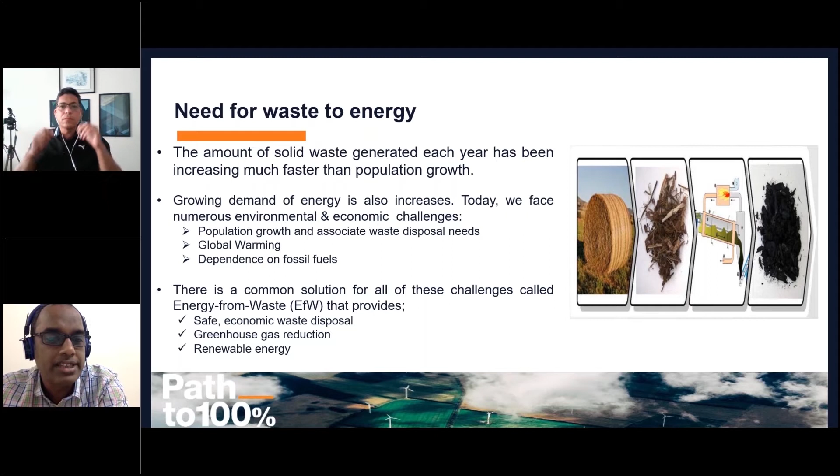As you know, biomass is considered to be one of the best potential sources available across the world. India produces about 450 to 500 million tons of biomass per year, waste biomass coming out from different agricultural residues and forestry. Biomass provides 32% of all primary energy usage in the country at present. The Ministry of New and Renewable Energy, MNRE India, estimates that the potential for power from biomass in India is about 18,000 megawatt as per the reference cited.

The current share of biofuels in total fuel consumption is extremely low and is confined mainly to 5% ethanol blending in gasoline. Now we all know that Brazil is a top manufacturer of ethanol from bagasse, sweet potatoes and other related sources. Brazil is using gasoline engines with the maximum blending with petrol. So Brazil is leading the usage of biofuel in internal combustion engines.

The Ministry of Renewable Energy has been implementing biomass power and co-generation for both power as well as heat generation. A total of 288 biomass power and co-generation projects with a capacity of 2,665 megawatt is installed in India, combined with 158 bagasse co-generation projects in sugar mills with surplus capacity aggregating 1,666 megawatts.

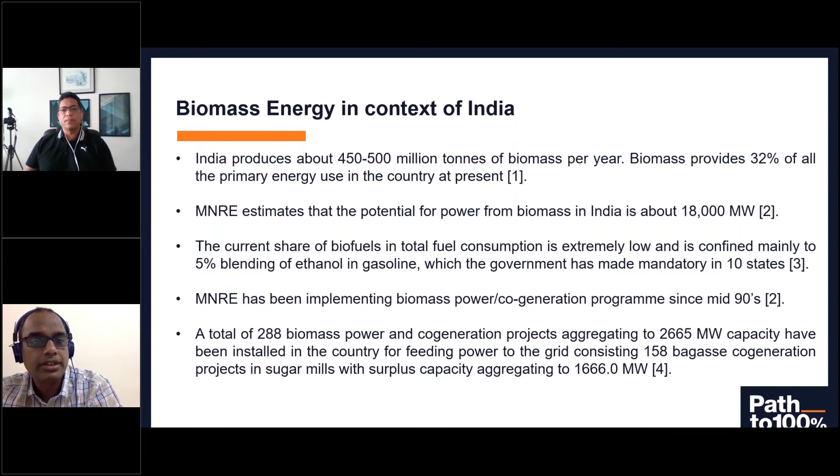So, well, you're supposed to know what is biomass. Biomass is considered to be one of the potential sources: all organic matter generated through photosynthesis and other biological processes. It consists of bio plus mass. Bio means a biologically derived substance which has some kind of mass. That is why it's called biomass.

Different biomass you come across in daily experience. You may come across wood and forest residues, waste from food crops. Then different waste comes out from the kitchen, then from the food processing industries, animal waste, manure, which is rich in phosphorus. Then human waste, which has the potential of energy, which can be converted into either a fertilizer or in the form of liquid or gaseous fuels, which can be fed into the different applications.

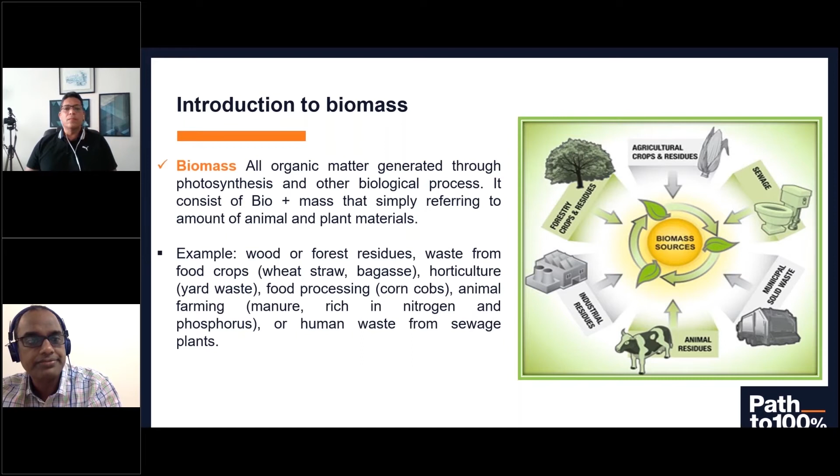So we know that there are different compositions which are available in the biomass. Lignocellulose biomass utilization has gained worldwide attention due to the property of green, copious distribution, and renewable source. The residues from agricultural activities and forest environments are the important source of lignocellulosic biomass. Major chemical constituents of the biomass are cellulose, hemicellulose, and lignin in terms of 39%, 31%, 18% by weight respectively.

Okay, this photograph talks about the different biomass sources available. You can see here in the rightmost one, the cellulose content is major in terms of biomass, 39%. Hemicellulose will be available. If you take any biomass, either forestry waste or agricultural residues, you can find out the chemical composition of different biomass. Cellulose, hemicellulose, and lignin are the major constituents present in the biomass. And then you can find out the application. You want to convert the biomass into a liquid fuel or gaseous fuel or solid fuel. So, accordingly, it's going to differ.

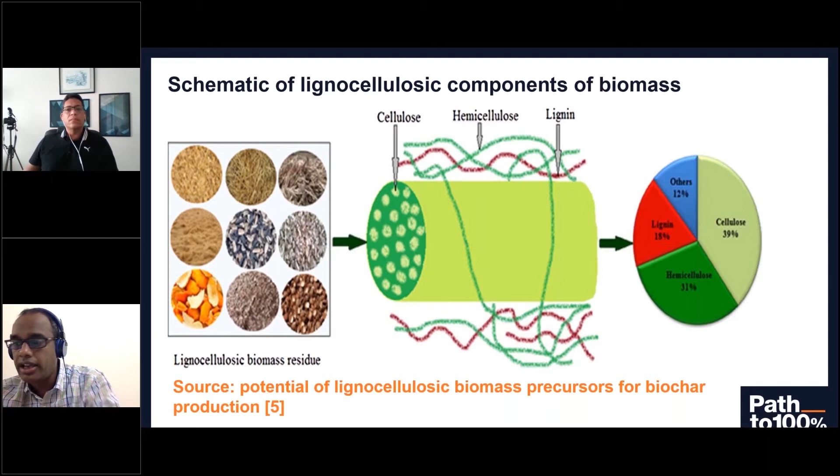So, what is the significance of the biomass? What is the significance of energy which is going to get derived from the biomass? It is a renewable source of energy. It's not going to be exhaustible. You can get it at any point of time. And also the cost of feed material you are going to use for biofuel production or bioenergy generation will be very low when compared to fossil fuels of coal and oil as well as gaseous fuels.

Biomass consumes more CO2. That is very much advantageous. Whereas by consuming the fossil fuels, it liberates a lot of CO2, which is increasing global warming. Global temperature increases because of the increase in the CO2 level. Whereas if you make biomass a source, and if you cultivate it in very far lands or dry lands, you can grow the trees or other kinds of agricultural products. It is going to consume whatever CO2 is available in nature. So the CO2 balance is going to happen by using the biomass.

And also you can see here there is a lot of biomass still not utilized from an application point of view. We are not going to use the biomass from the edible source. Still a few millions of species are available, not traced out so far for utilization in converting into energy. And also by increasing the biomass utilization or growing biomass resources, it can stabilize the soils. That is very much important, and improve the soil fertility and reduce the erosion.

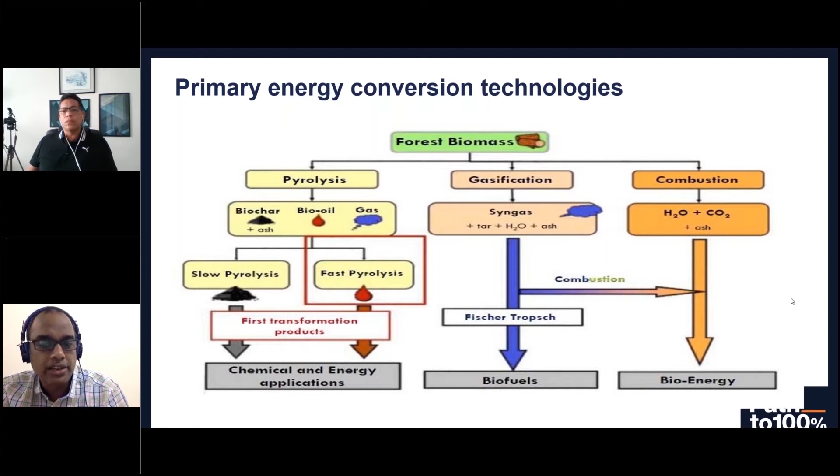Depending upon the operating temperature and residence time of the pyrolysis process, you are going to get three products: biochar, bio oil, and gas. If you want more liquid, you can increase the temperature of the reaction. There are three methods we generally utilize for converting solid biomass, whether you want a liquid or a gas, or to burn the fuel using the combustion method.

Pyrolysis is the method we are currently working on in NIT Tiruchi, together with Tomsk Polytechnic University and COPPE, Brazil. Professor Amro is also contributing to the two projects, one from SPARC and another from the BRICS project. So we are likely to work on pyrolysis.

Pyrolysis is the thermal decomposition of the material you feed into the pyrolyzer at elevated temperature. But you are not adding any kind of oxygen or air into the system. The process is done in the absence of air. Ultimately, you are going to get three products: solid, liquid, and gaseous products.

This liquid can be used in an internal combustion engine, thermal power plants, or a gas turbine power plant. The char can be converted into a catalyst, or used as a fertilizer. The gaseous fuel can be used in an internal combustion engine or a gas turbine, or in a steam power plant or gas turbine power plant.

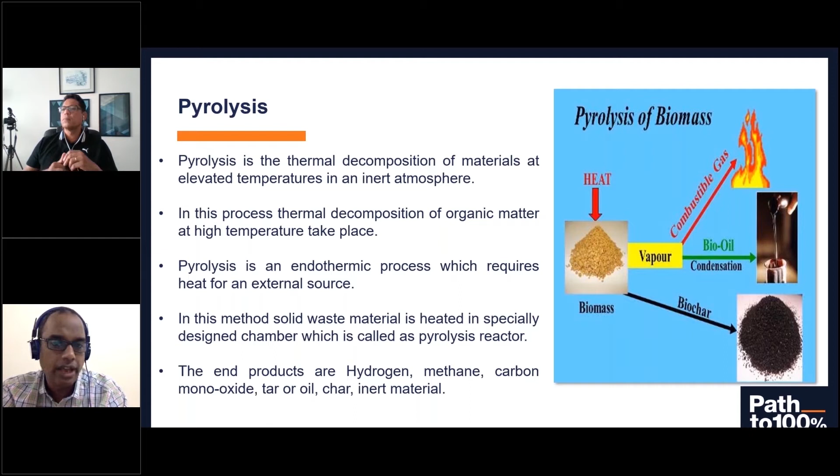The products that come out from pyrolysis are in the form of hydrogen, methane, carbon monoxide, and the oil. You want to operate the system in the absence of air, that is, inert in nature. As for the mechanism of pyrolysis, the word is pyro and lysis. Pyro means heat, lysis means breaking down the heavier molecules into small molecules.

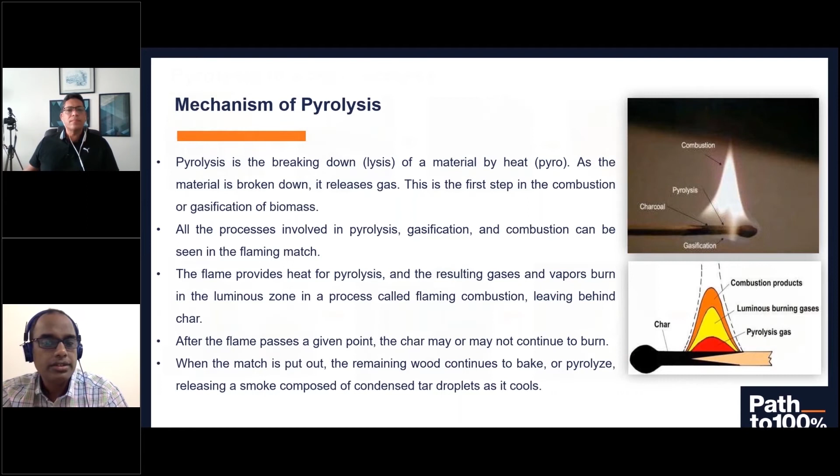The products you get from pyrolysis are in the form of liquid, gas, and solid. But in pyrolysis, you get the maximum amount of liquid apart from the solid and gaseous products. There are many biomass sources available, and in our campus we have used Cassia fistula, the golden shower tree. You may have come across it.

That waste material is polluting the environment, and the waste is generated in a huge amount. So we take out the seed and the shell and convert it into a solid product which can be ground into a fine size. Then we take it to the pyrolyzer. We can use either a thermal pyrolyzer or electrical pyrolyzer, or recently we are using microwave pyrolysis.

As you know, microwave is also an energy intensive process, but the amount of energy consumed for melting the solid biomass is comparatively lower than electrical and thermal pyrolysis. Also, the heat comes from inside to out, which means the energy losses to the surroundings are minimized. So we go for a microwave pyrolysis system.

The products you get are condensable and non-condensable gases. The condensable gases are connected to a condenser and converted into liquid, which we call bio oil. The non-condensable gases can be taken for some kind of thermal application, flared, or burned in an engine to convert into power. The solid residue generated in the pyrolyzer, whether microwave, thermal, or electrical, can be converted into a fertilizer or into a catalyst by converting it to activated carbon.

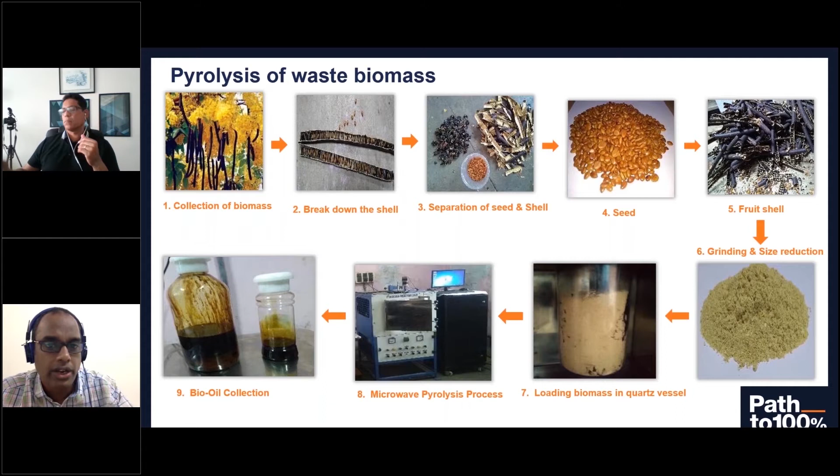Seed you can directly convert it into liquid. Okay, so this is the photographic view of oil extracted from the pyrolysis process, particularly microwave pyrolysis. Then the non-condensable gases are not going to be condensed. Then you can burn it. We can use it for any kind of heating application, or burn it in the internal combustion engine. You can use it in a diesel engine. You can burn it and produce power, or you can have a standby diesel generator. You can use it for producing power.

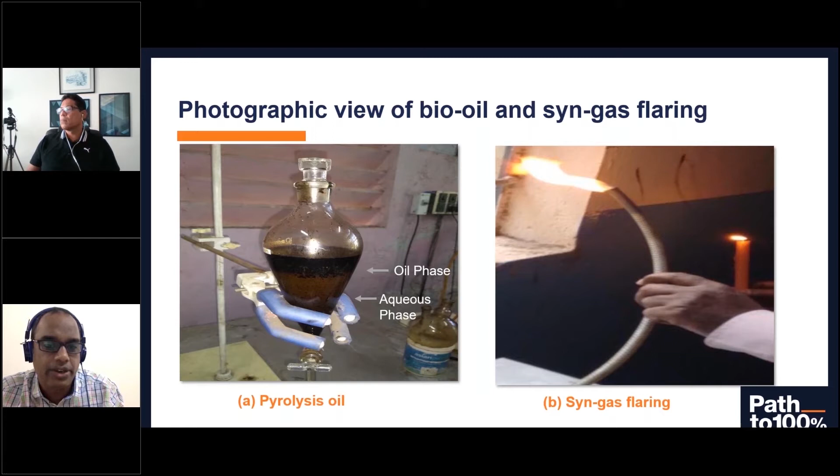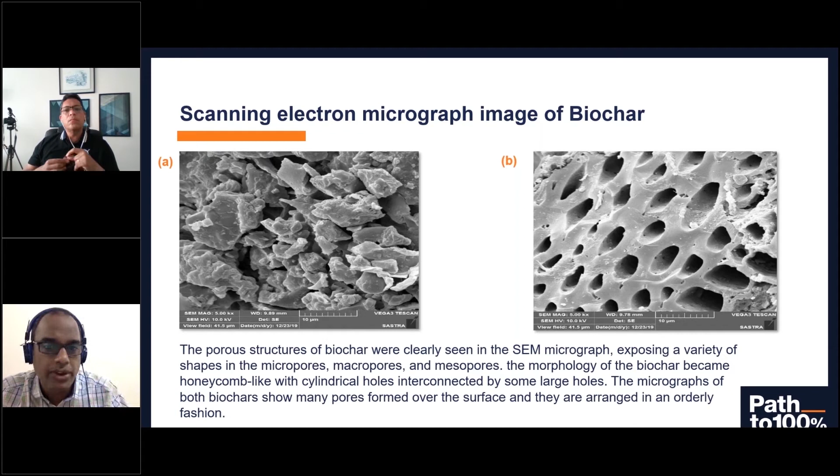So we are going to get three products. Solid, you can use it for many applications, wastewater treatment as well as converting into catalyst. Then we can use it for fertilizer. Liquid, we can use it for internal combustion engine and gas turbine application. Gaseous one, you can use it for internal combustion engine, or take it for gas turbine as well as thermal power plant. So nothing is going to be wasted. And whatever gas comes out, you can burn it efficiently without polluting the environment.

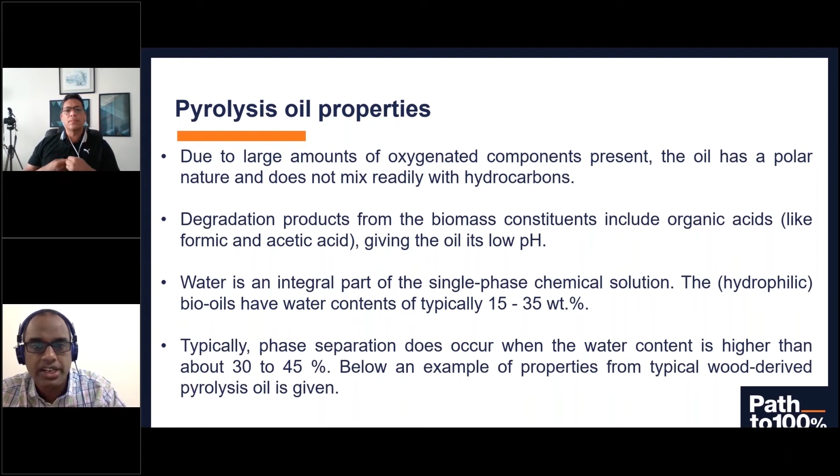So for pyrolysis oil properties, you can take it for gas chromatography spectroscopic analysis. You can find out what different species of hydrocarbon are present. Then you can find out what the energy content may be. You can compare with petrol and diesel. As you know, petroleum products come around 48,000 kilojoules per kg. Diesel comes around 45,000 kilojoules per kg. The bio oil is not at all going to be inferior to gasoline and diesel. It is comparatively equivalent to diesel because bio oil is a non-volatile fuel, so we can directly use it as a complete replacement of the diesel fuel. It has a good property.

So if you take out the properties for bio oil, gasoline, diesel, biodiesel and vegetable oil, you can see here the density of the bio oil is slightly higher, and viscosity is slightly higher. Flash and fire point is much higher than diesel and petrol. That means there is no problem transporting this fuel. And you can operate at places where the liquid is likely to be frozen. We can go up to minus 20 degrees centigrade. Where the temperature does not fall below minus 10 degrees, you can use it conveniently. Otherwise, you can use some kind of additives in this pyrolysis oil. Then you can use it efficiently.

Okay, so you can see here it is approximately 60% of the calorific value of the diesel. That means the only thing is you're going to increase the volume of the diesel tank by twice. And the density is comparatively higher. So to reduce the viscosity as well as the density, you can blend it with diesel or other liquid fuel which has lower viscosity as well as lower density.

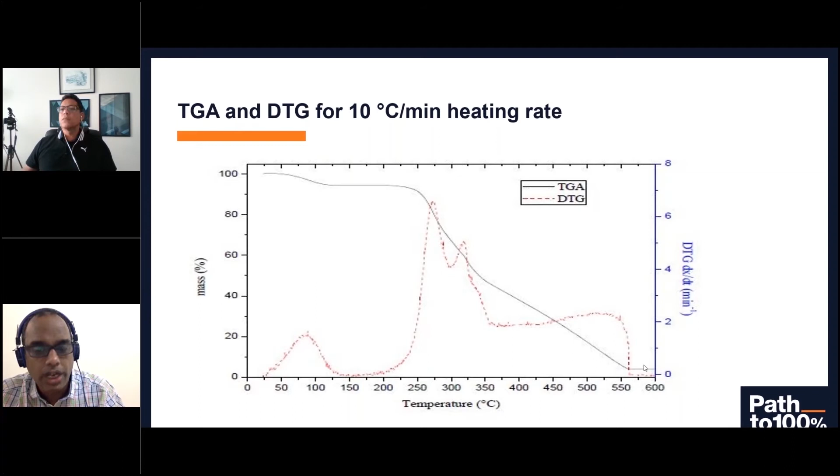Whether you go for slow pyrolysis, medium pyrolysis or fast pyrolysis, and the residence time in which you are going to operate it, that decides the product yield, whether you want more liquid, more solid or more gaseous products. That depends upon the operating temperature.

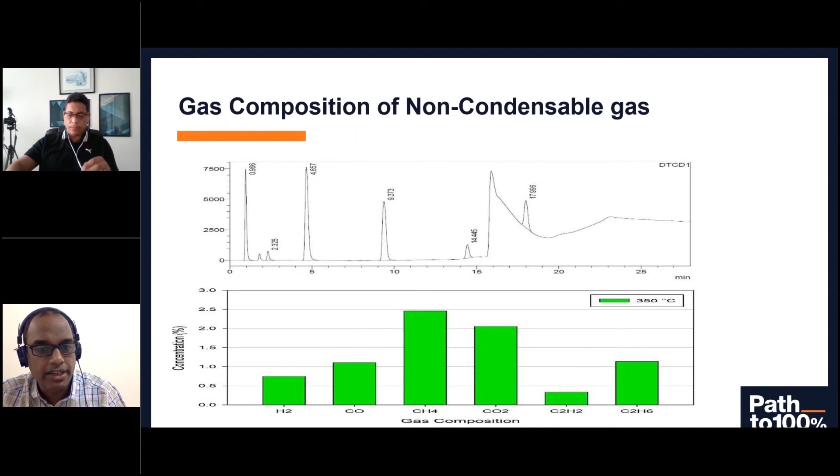Yeah. So, various processes. I think I'm going to take maximum 5 minutes.

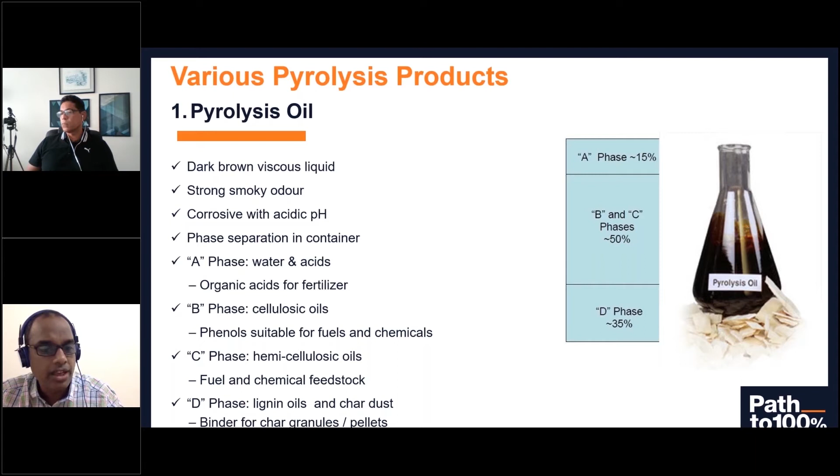B phase is cellulosic oils. Normally the phenols are suitable for fuels and chemicals. So there are different layers you are getting, and you can separate them out according to their different densities. Then it has several applications. A you can use for fertilizer, B phase for chemicals and fuels, C phase for fuel and chemical feedstock preparation, and D phase for binder for char granules for pellets.

So in non-condensable gas there are several products: hydrogen, CO2, CO, and other things. It also has potential applications. You can use it for a gas turbine, internal combustion engine or thermal power plant. Otherwise you have to flare it up. It also has energy content, so you should not leave it to the surroundings. It has some hazardous constituents.

Biochar: after converting the biomass into bio oil or non-condensable gases, whatever residue is left over in the pyrolysis is called biochar. We call it charcoal. It is carbon rich in nature. It contains inorganic minerals from the biomass. You can use it as a fertilizer, or convert it into a catalyst for Fischer-Tropsch reaction or any other reaction, or convert it into activated carbon for wastewater treatment.

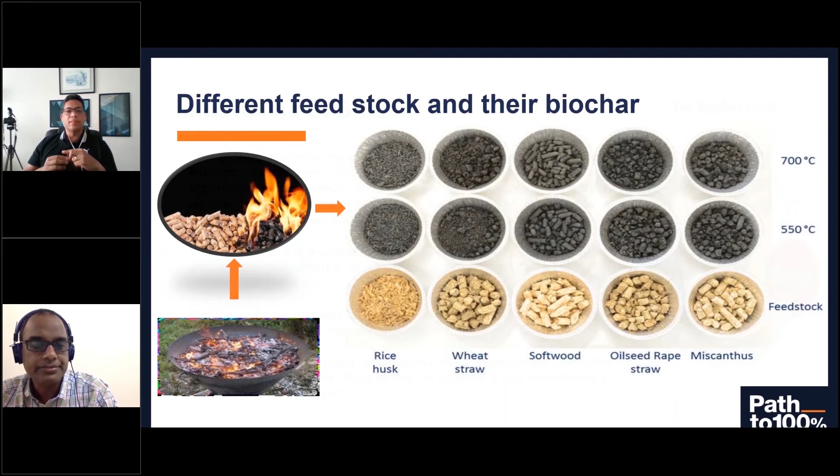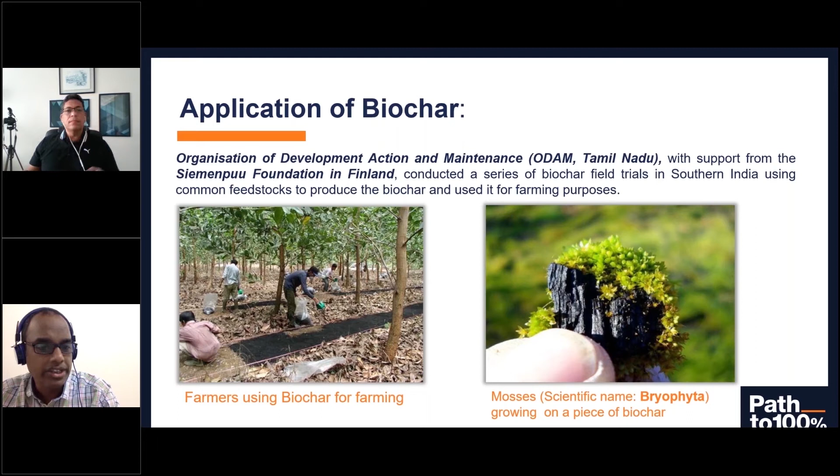So the importance of biochar I already explained. I don't want to repeat this one, but whatever biomass we are taking out has to go back to the earth as a fertilizer. It has a potential application as a fertilizer for growing trees and other agricultural crops.

So, different applications of bio oil. You can convert it into chemical products. You can use it for fermentation, convert it into ethanol, and use it in a petrol engine. You can use it as turbine or diesel engine fuel, and as fuel for thermal power plants, particularly steam turbine power plants. You can upgrade it through refinery methods. You can take out the hydrogen from the syngas generated from either the pyrolyzer or gasifier and use it for fuel cell applications.

And just to let you know, you have 2 more minutes. Yeah, I'll likely be there. Coming to the conclusion. Okay.

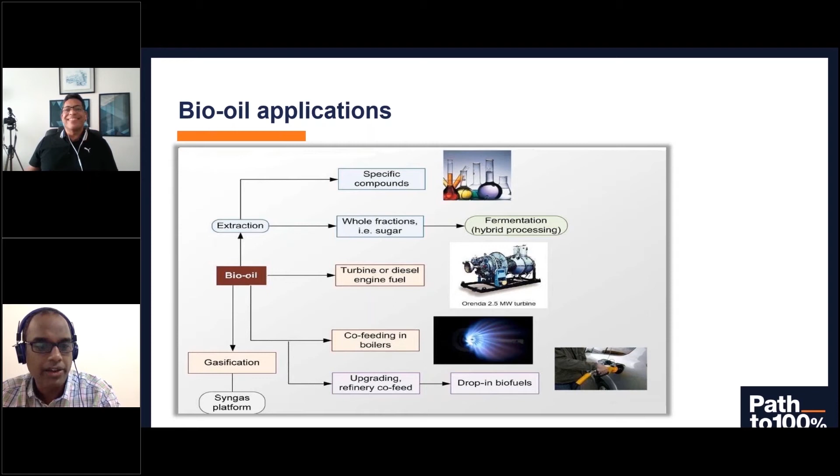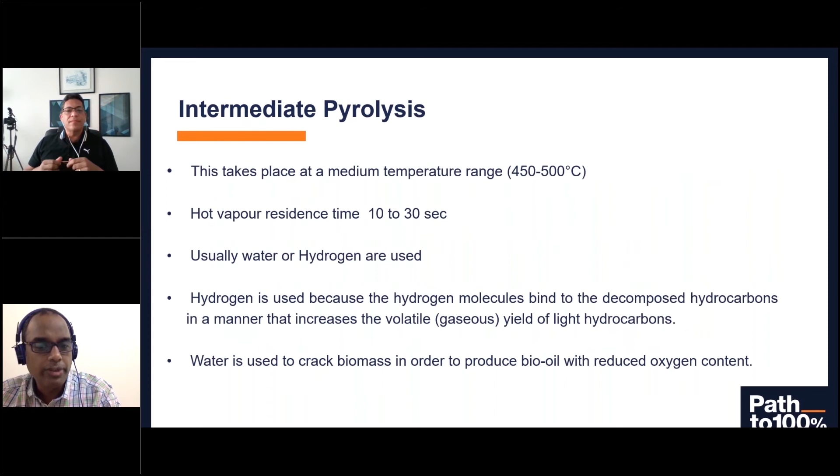Okay, so there are different pyrolysis processes. They vary based on the operating temperature, from slow to intermediate pyrolysis, and the residence time. So we are classifying the pyrolysis into 3 types. The most preferable one is flash pyrolysis, operating at a temperature of 450 to 900 degrees centigrade. The heating rate is 2 degrees per second.

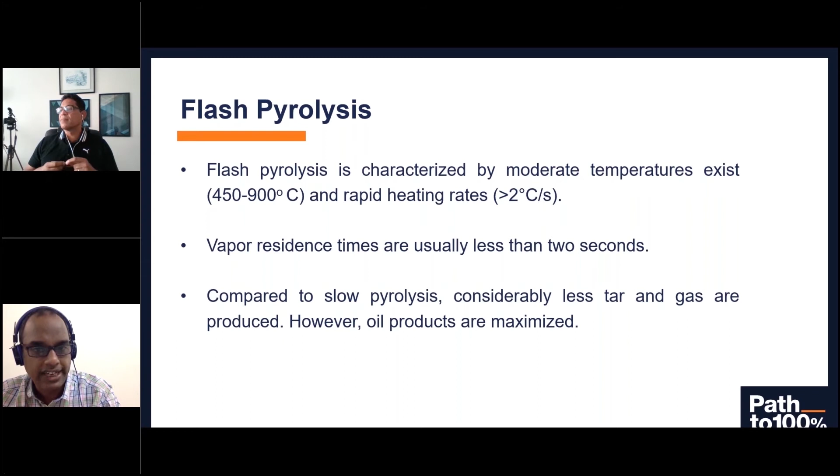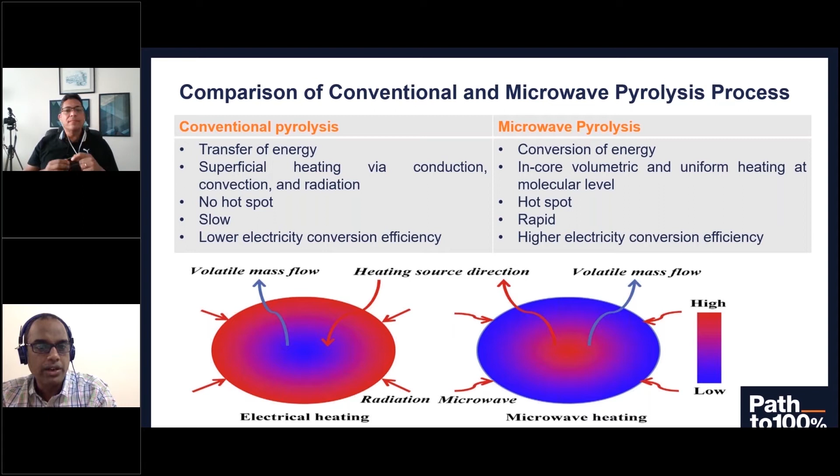Microwave pyrolysis is recent research they are doing, because it has a lot of potential. The energy needed for converting into liquid will be minimum while converting liquid to the maximum level, because the energy generated inside goes from the inside of the system to the surroundings, so the losses will be minimized.

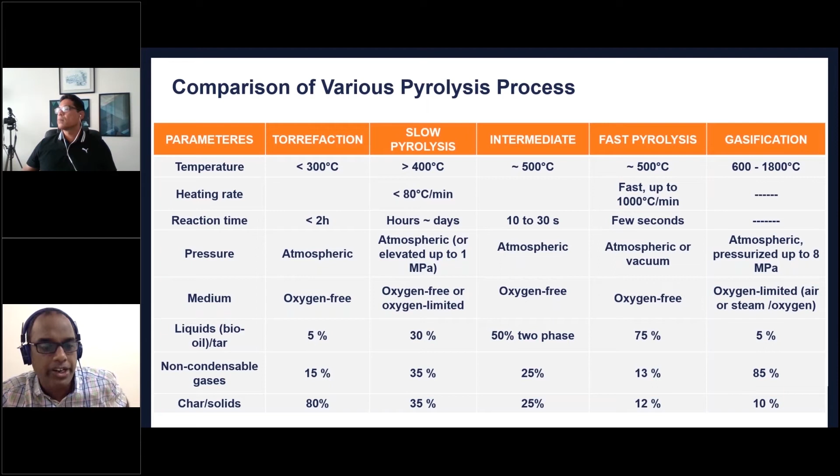Okay, so the table shows the different pyrolysis processes with respect to operating temperature. Depending upon the product you need, either solid, liquid, or gas, this is going to differ. The different properties I already discussed.

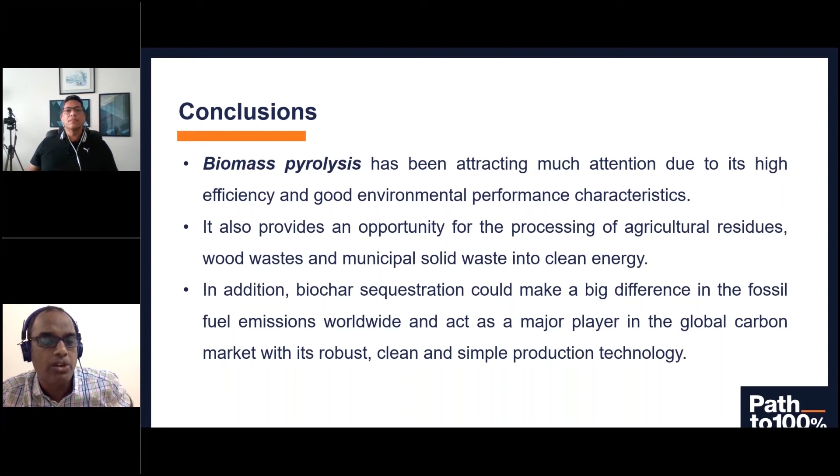So conclusions: biomass pyrolysis has been attracting much attention due to its high efficiency and good environmental performance characteristics. It also provides an opportunity for the processing of agricultural residues, wood waste, and municipal solid waste into clean energy production. In addition, biochar sequestration could make a big difference in fossil fuel emissions worldwide and act as a major player in the global carbon market with its robust, clean, and simple production technology.

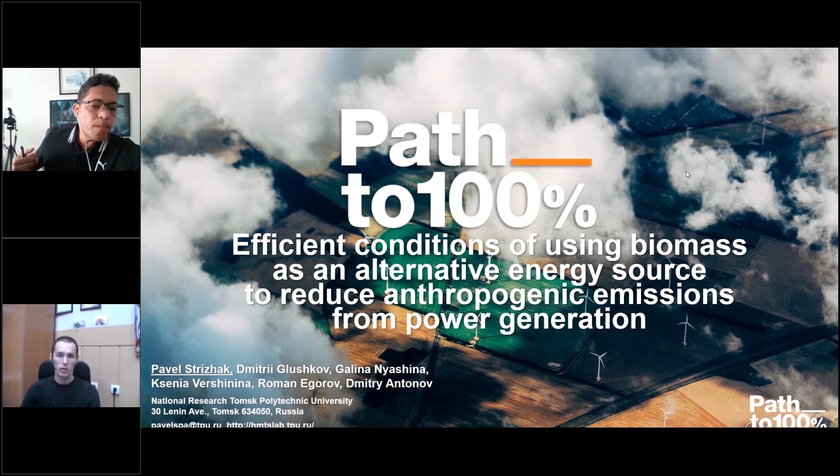At the beginning, I would like to say several words about the motivation of the present study. Biomass is the fourth largest energy source after coal, oil, and natural gas. It is a renewable source and a carbon-neutral fuel with the additional advantage of low nitrogen and sulfur content. Therefore, biomass is currently one of the most promising renewable energy sources. Using biomass in thermal power engineering can make a difference for economic development in rural regions and improve the internal energy security of a country due to the variety of available biomass resources and low level of greenhouse gases as opposed to fossil fuels.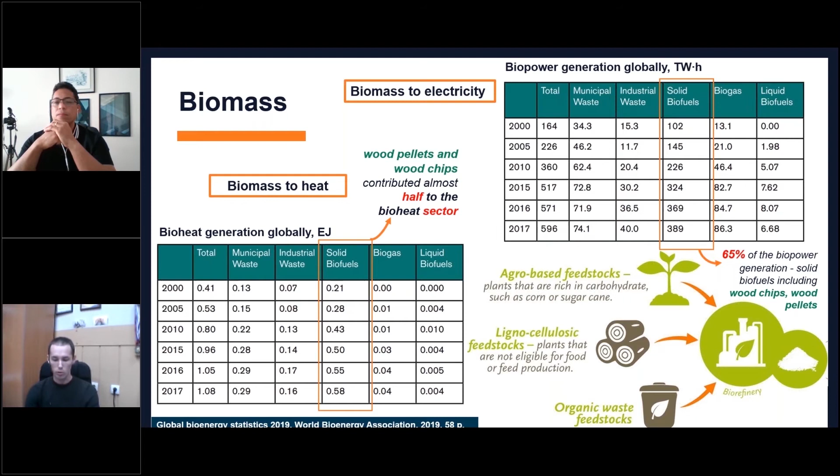The main methods used to process biomass for power generation are thermochemical and biochemical. The latter methods, such as extraction and hydrolysis, are more expensive and sophisticated in their practical implementation. Combustion, gasification, and pyrolysis are the most widely used thermochemical ways of biomass conversion. Each method has advantages and disadvantages. Gasification and pyrolysis are of interest in this study because new products can be produced during this process, such as liquid or solid fuels and a group of materials for chemistry.

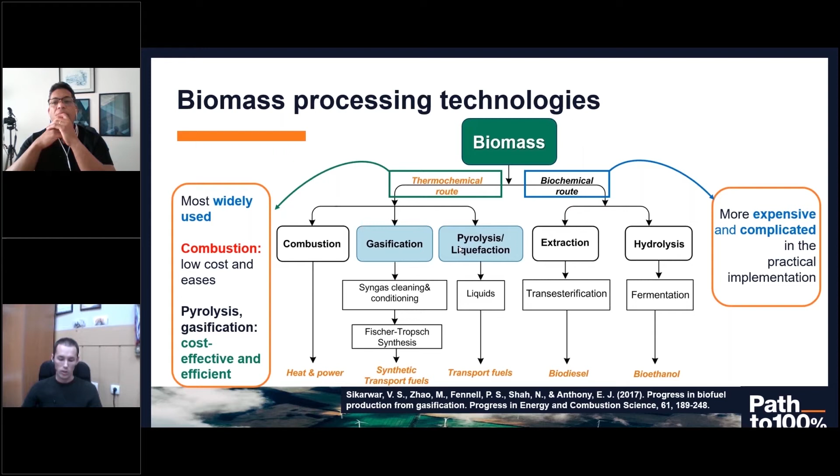As you can see on the scheme, biomass gasification is a multi-level physical and chemical process converting organic fuels into a gas at temperatures between 600 and 1500 degrees Celsius. A gasifying medium can be air, oxygen, water vapor, carbon dioxide, or a mixture of them. The generated syngas consists of methane, carbon dioxide, hydrogen, carbon monoxide, a small amount of light hydrocarbons, and other pollutants. The concentration of each component of the gas mixture mainly depends on the process conditions in a reactor, local conditions in the fuel sample, the chemical composition of biomass, and the structure of gasifiers.

Apart from syngas, the typical biomass gasification products are biochar, biofuel, and heat. The biggest challenge of gasification is the production of tar. It significantly reduces the quantity of syngas and interacts with the reactor walls. In contrast to gasification, pyrolysis proceeds at high temperatures in an inert gas atmosphere. Pyrolysis can be used on its own or can be the main stage of chemical reactions during gasification and combustion.

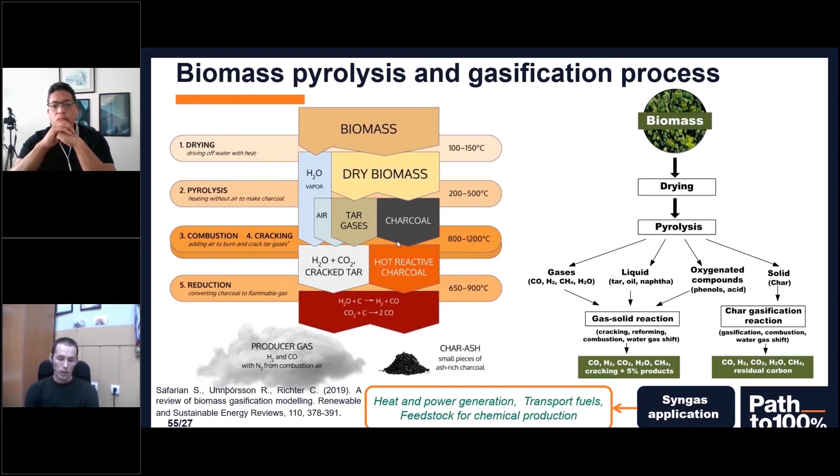In conclusion of the first part of our presentation, it should be mentioned that biomass is a high potential alternative energy source and feedstock to produce useful products for the chemical industry. The purpose of our study is experimental research of pyrolysis characteristics for a group of various biomass and their mixture with varying process parameters in a wide range. Experimental setup and procedures will be presented in the next part of the presentation.

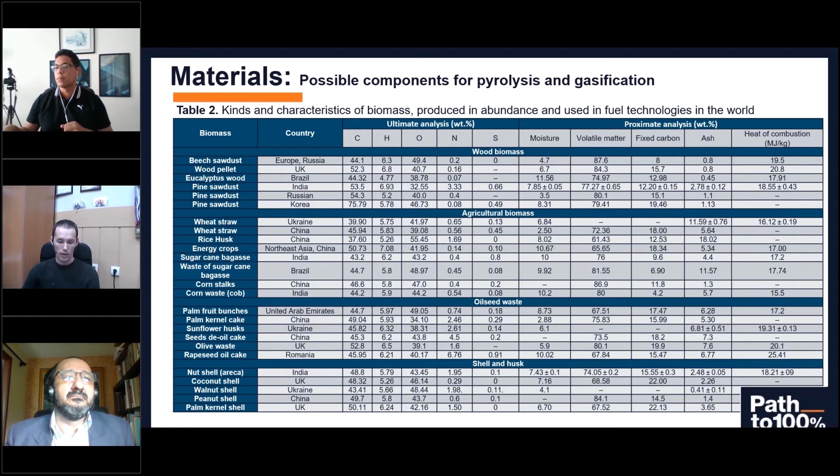There was no access of outside air to the furnace during the experiments. The duration of the experiments was about 30 minutes. The gases left after the experiments were removed from the chamber by blowing air through it. We conducted no less than 3 runs at identical initial conditions. The next table illustrates kinds and characteristics of biomass widely used in fuel technologies all over the world. Based on this data, we chose only 3 typical kinds of biomass for our experimental study. They are sawdust, straw, and leaves. We conducted experiments with those individual components and their blends.

The main obtained results will be presented in accordance with the investigated parameters and effects. They are component properties and concentration, biomass moisture, thermal conditions, ratio of pyrolysis products with CO2 and water vapors in the combustion chamber, mass, shape, and surface structure of samples, dispersion of components, and a mixture of biomass with other components. Experiments for leaf, straw, sawdust and the 3 blends were conducted at identical initial conditions. Compositions of blends you can see in the 3 right columns.

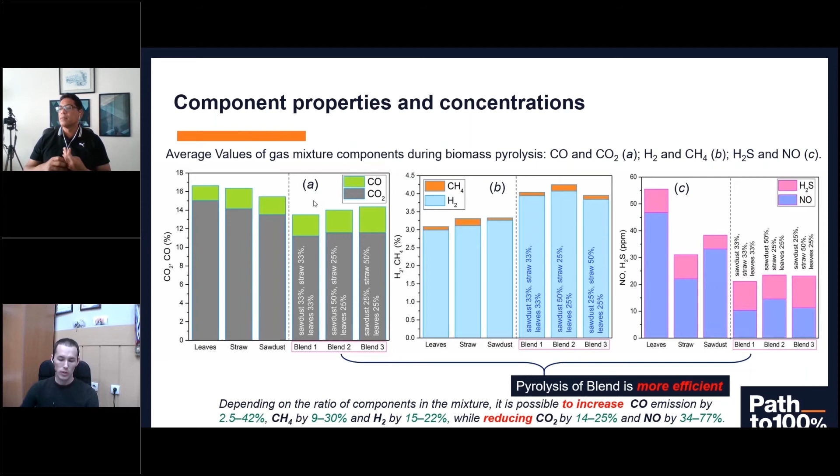It was obtained that the pyrolysis of blends is more efficient. Depending on the ratio of components in the biomass mixture, it is possible to increase the CO emissions by 2.5-42%, methane by 30%, and hydrogen by 22%, and to reduce the carbon dioxide concentration by 25% and nitrogen oxides by 77%. According to the obtained results, biomass blend number 3, sawdust 25%, straw 50%, and leaf 25%, is more promising for following investigations.

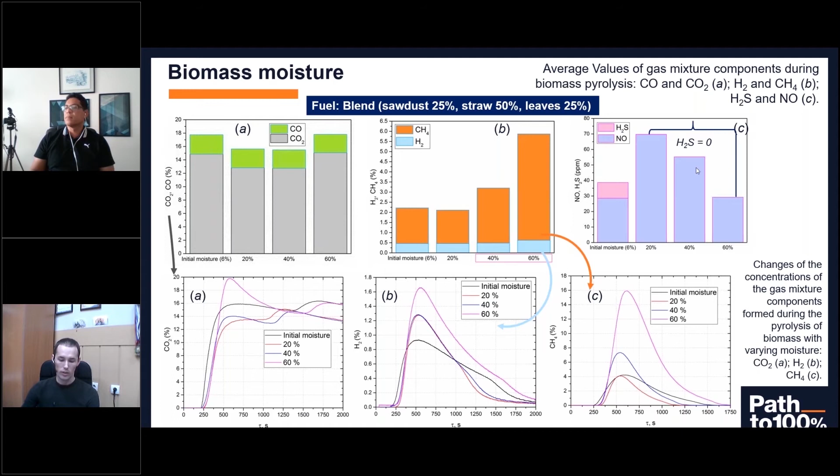The next investigated factor is the biomass moisture influence on the composition of the gas mixture. At the bottom of the slide, you can see typical trends of carbon dioxide, hydrogen, and methane concentration during pyrolysis. Average values of gas mixture components during this process are presented at the top of the slide. The higher the biomass blend moisture, the higher the concentration of useful gases.

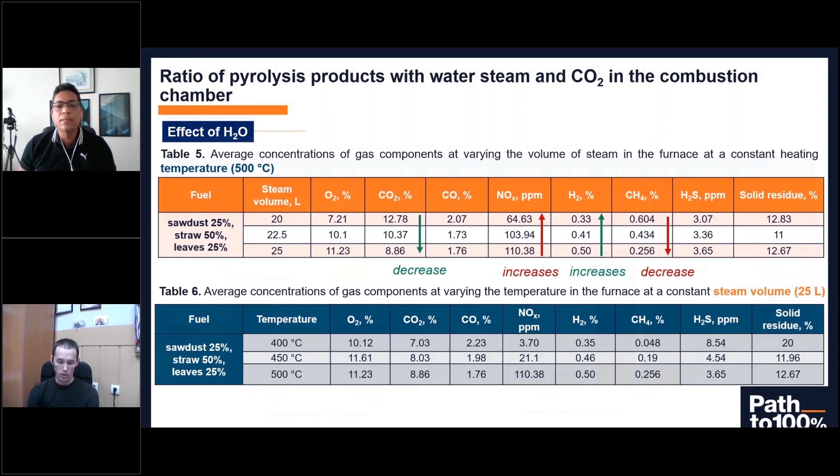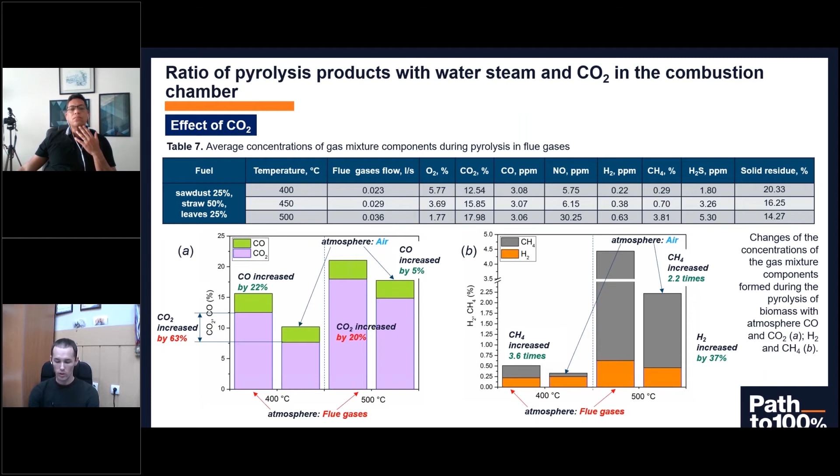The next two slides illustrate the influence of changing air in the combustion chamber to water steam and carbon dioxide on the pyrolysis characteristics. Table 5 illustrates the influence of water vapors on the gas concentrations. The higher the water steam concentration, the lower the concentration of carbon dioxide and methane, and the higher the concentration of nitrogen oxide and hydrogen. The next results illustrate that we obtain a significant increase in concentration of carbon monoxide and carbon dioxide, methane and hydrogen during pyrolysis when the oxidizing environment in the chamber was replaced with flue gases.

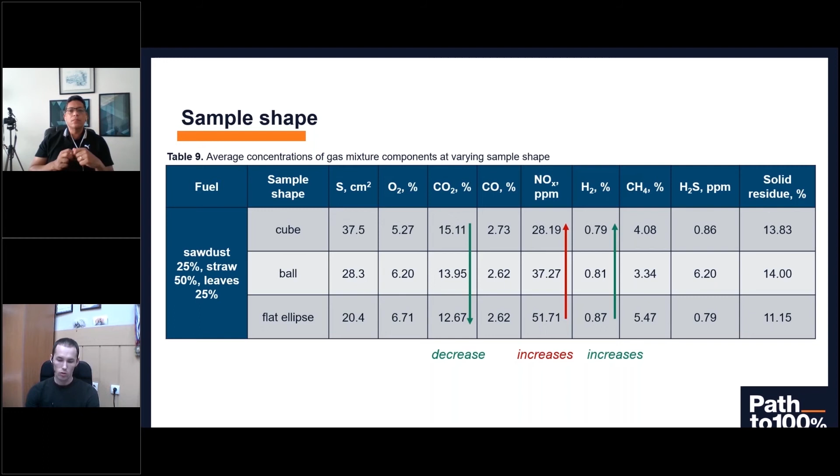Of course, experimental samples significantly influenced the integral characteristics of the process, such as the volume of produced gas mixture, but the concentration of its components did not vary significantly. In our experiments, we found that the shape of the experimental sample and the structure of the surface affect the characteristics of the process under conditions of equivalent initial weight of the biomass blend sample.

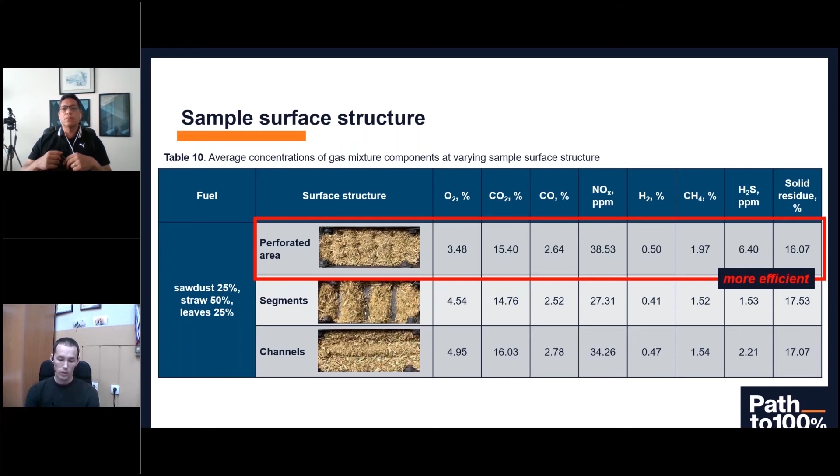We explained the obtained results by the difference in the degree of biomass conversion with different methods of preparing experimental samples. It should be mentioned that the biomass particle size of about 240 micrometers is more efficient in comparison with the other two values. In the first case, when the particle size was 2 millimeters, the degree of biomass conversion is not very high. In the second case, when the particle size was about 120 micrometers, the above-mentioned parameter is high enough, but the cost of grinding the biomass is too high.

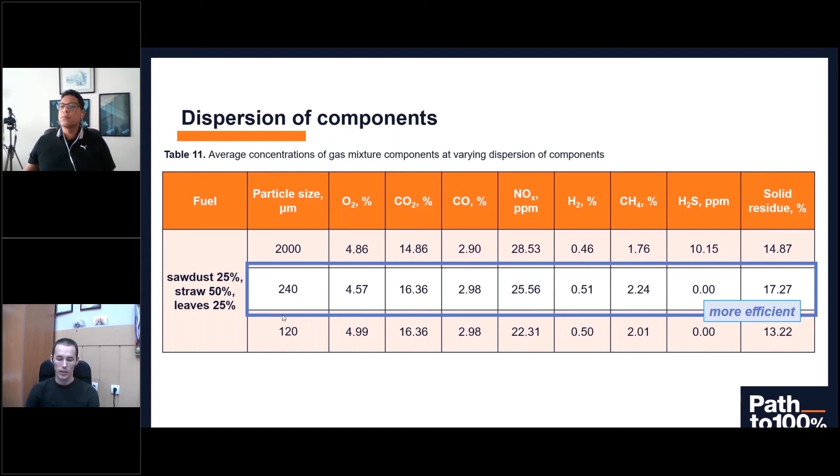The next two slides illustrate the influence of various additives to biomass blends on the pyrolysis characteristics. We used various kinds of coal and municipal solid waste. It has been established that this direction is promising for further experimental study.

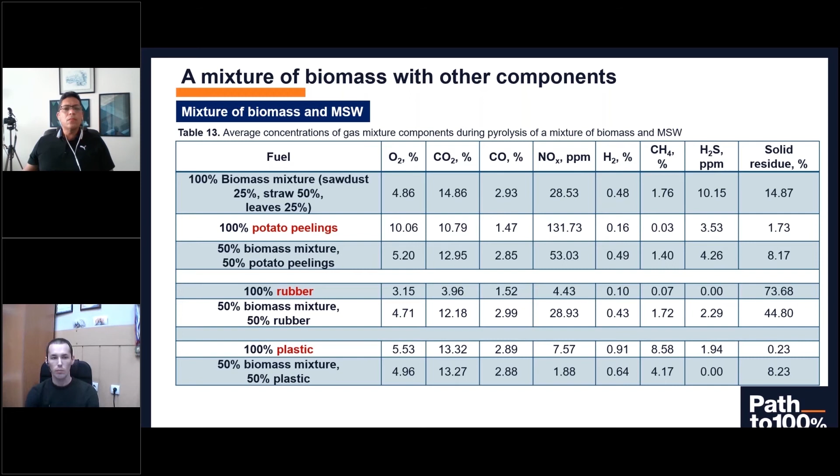At the end of my presentation, I would like to present the main results. The typical products of thermal decomposition of biomass are carbon monoxide, carbon dioxide, hydrogen, methane, nitrogen oxide, and hydrogen sulfide. The variation rate of gas concentration is presented on the slide. Like in the case of combustion, the pyrolysis of mixtures has proven to be more efficient.

It was established that depending on the ratio of components in the mixture, one can increase the useful components of flue gases, while the harmful components can be decreased, due to synergetic effects from the interaction of various biomass components and the pyrolysis products.